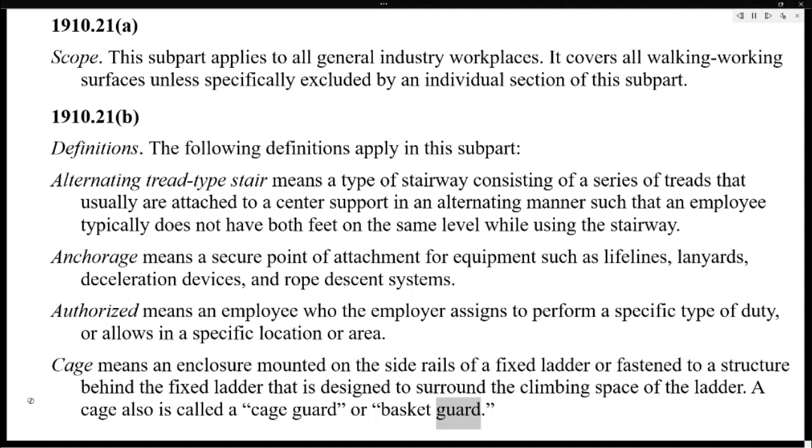Carrier means the track of a ladder safety system that consists of a flexible cable or rigid rail attached to the fixed ladder or immediately adjacent to it. Combination ladder means a portable ladder that can be used as a step ladder, extension ladder, trestle ladder, or stairway ladder. The components of a combination ladder also may be used separately as a single ladder.

Dangerous equipment means equipment, such as vats, tanks, electrical equipment, machinery, equipment or machinery with protruding parts, or other similar units that, because of their function or form, may harm an employee who falls into or onto the equipment. Designated area means a distinct portion of a walking-working surface delineated by a warning line in which employees may perform work without additional fall protection.

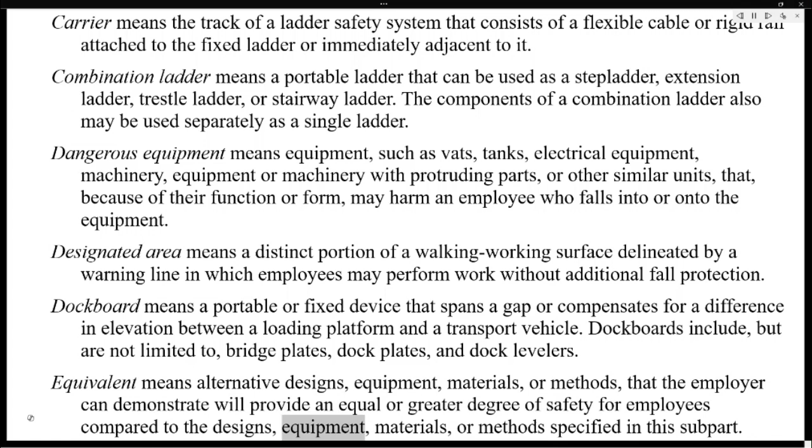Dockboard means a portable or fixed device that spans a gap or compensates for a difference in elevation between a loading platform and a transport vehicle. Dockboards include, but are not limited to, bridge plates, dock plates, and dock levelers. Equivalent means alternative designs, equipment, materials, or methods that the employer can demonstrate will provide an equal or greater degree of safety for employees compared to the designs, equipment, materials, or methods specified in this subpart.

Extension ladder means a non-self-supporting portable ladder that is adjustable in length. Failure means a load refusal, breakage, or separation of component parts. A load refusal is the point at which the ultimate strength of a component or object is exceeded. Fall hazard means any condition on a walking-working surface that exposes an employee to a risk of harm from a fall on the same level or to a lower level. Fall protection means any equipment, device, or system that prevents an employee from falling from an elevation or mitigates the effect of such a fall.

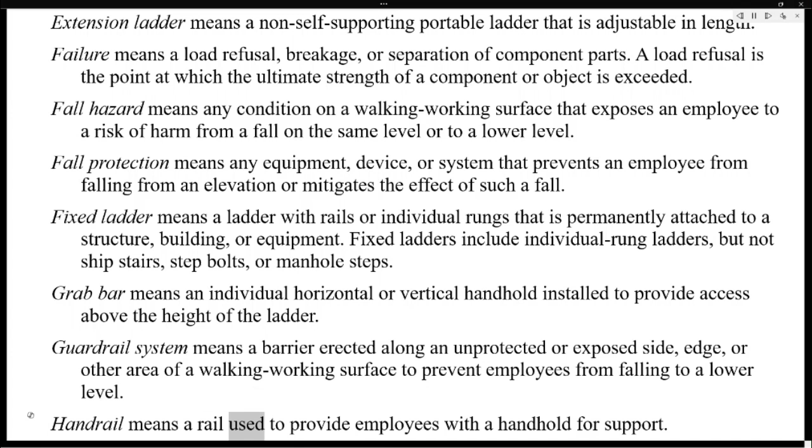Fixed ladder means a ladder with rails or individual rungs that is permanently attached to a structure, building, or equipment. Fixed ladders include individual rung ladders, but not ship stairs, step bolts, or manhole steps. Grab bar means an individual horizontal or vertical handhold installed to provide access above the height of the ladder. Guardrail system means a barrier erected along an unprotected or exposed side, edge, or other area of a walking-working surface to prevent employees from falling to a lower level. Handrail means a rail used to provide employees with a handhold for support.

Hoist area means any elevated access opening to a walking-working surface through which equipment or materials are loaded or received. Hole means a gap or open space in a floor, roof, horizontal walking-working surface, or similar surface that is at least 2 inches (5 centimeters) in its least dimension. Individual rung ladder means a ladder that has rungs individually attached to a building or structure. An individual rung ladder does not include manhole steps.

Ladder means a device with rungs, steps, or cleats used to gain access to a different elevation. Ladder safety system means a system designed to eliminate or reduce the possibility of falling from a ladder. A ladder safety system usually consists of a carrier, safety sleeve, lanyard, connectors, and body harness. Cages and wells are not ladder safety systems.

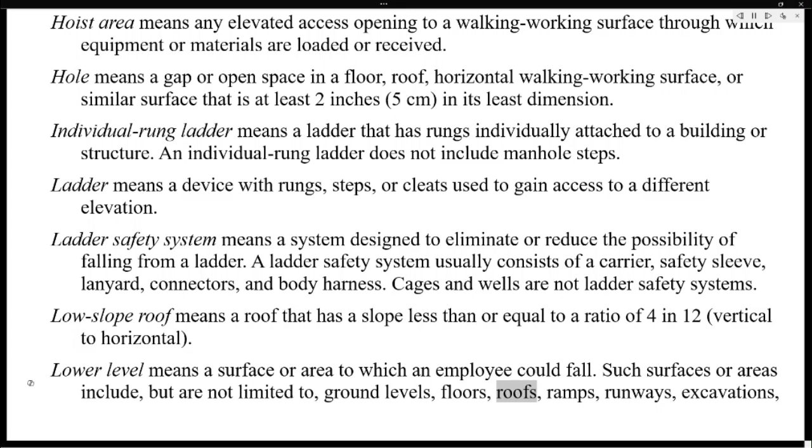Low-slope roof means a roof that has a slope less than or equal to a ratio of 4:12, vertical to horizontal. Lower level means a surface or area to which an employee could fall. Such surfaces or areas include, but are not limited to, ground levels, floors, roofs, ramps, runways, excavations, pits, tanks, materials, water, equipment, and similar surfaces and structures, or portions thereof. Manhole steps means steps that are individually attached to or set into the wall of a manhole structure.

Maximum intended load means the total load, weight, and force of all employees, equipment, vehicles, tools, materials, and other loads the employer reasonably anticipates to be applied to a walking-working surface at any one time. Mobile means manually propelled or movable. Mobile ladder stand means a mobile, fixed height, self-supporting ladder that usually consists of wheels or casters on a rigid base and steps leading to a top step. A mobile ladder stand also may have handrails and is designed for use by one employee at a time.

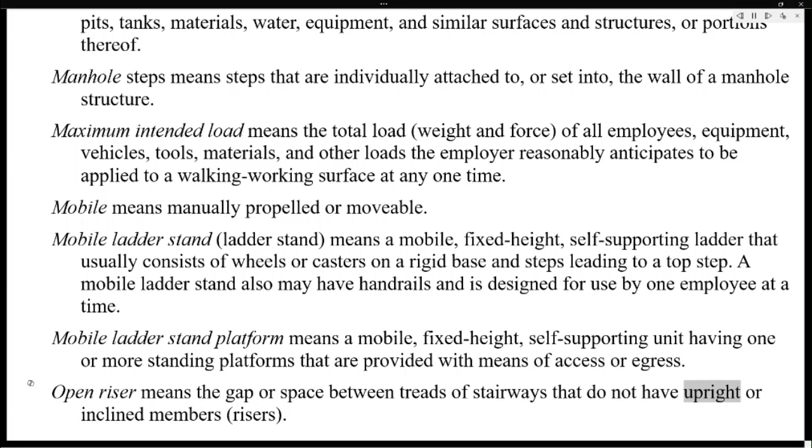Mobile ladder stand platform means a mobile, fixed height, self-supporting unit having one or more standing platforms that are provided with means of access or egress. Open riser means the gap or space between treads of stairways that do not have upright or inclined members (risers). Opening means a gap or open space in a wall, partition, vertical walking-working surface, or similar surface that is at least 30 inches (76 centimeters) high and at least 18 inches (46 centimeters) wide, through which an employee can fall to a lower level.

Personal fall arrest system means a system used to arrest an employee in a fall from a walking working surface. It consists of a body harness, anchorage, and connector. The means of connection may include a lanyard, deceleration device, lifeline, or a suitable combination of these.

Personal fall protection system means a system, including all components, an employer uses to provide protection from falling or to safely arrest an employee's fall if one occurs. Examples of personal fall protection systems include personal fall arrest systems, positioning systems, and travel restraint systems. Platform means a walking working surface that is elevated above the surrounding area.

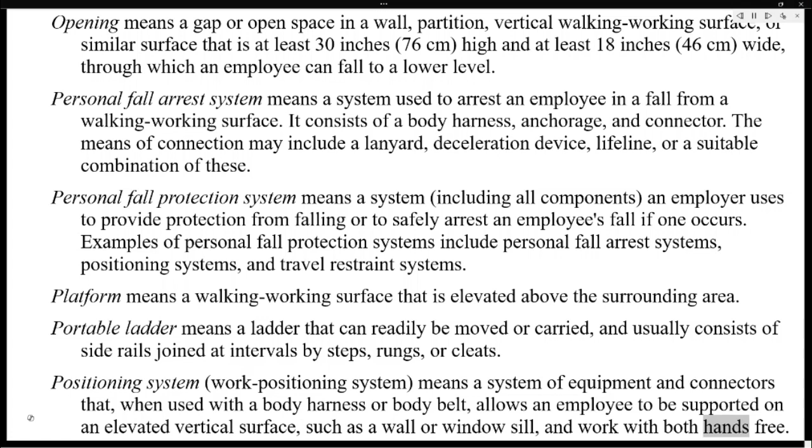Portable ladder means a ladder that can readily be moved or carried, and usually consists of side rails joined at intervals by steps, rungs, or cleats. Positioning system (work positioning system) means a system of equipment and connectors that, when used with a body harness or body belt, allows an employee to be supported on an elevated vertical surface, such as a wall or windowsill, and work with both hands free. Positioning systems also are called positioning system devices and work positioning equipment.

Qualified describes a person who, by possession of a recognized degree, certificate, or professional standing, or who by extensive knowledge, training, and experience has successfully demonstrated the ability to solve or resolve problems relating to the subject matter, the work, or the project. Ramp means an inclined walking working surface used to access another level. Riser means the upright, vertical, or inclined member of a stair that is located at the back of a stair tread or platform and connects close to the front edge of the next higher tread, platform, or landing.

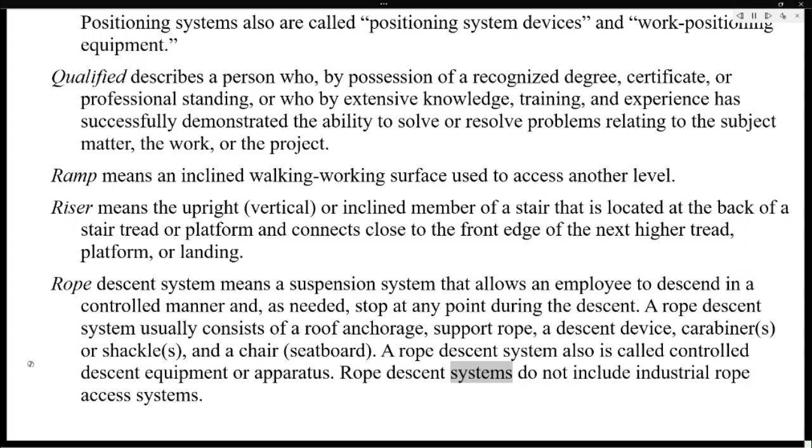Rope descent system means a suspension system that allows an employee to descend in a controlled manner and, as needed, stop at any point during the descent. A rope descent system usually consists of a roof anchorage, support rope, a descent device, carabiners or shackles, and a chair (seatboard). A rope descent system also is called controlled descent equipment or apparatus. Rope descent systems do not include industrial rope access systems.

Rung, step, or cleat means the crosspiece of a ladder on which an employee steps to climb up and down. Runway means an elevated walking working surface, such as a catwalk, a footwalk along shafting, or an elevated walkway between buildings. Scaffold means any temporary elevated or suspended platform and its supporting structure, including anchorage points, used to support employees, equipment, materials, and other items. For purposes of this subpart, a scaffold does not include a crane-suspended or derrick-suspended personnel platform or a rope descent system.

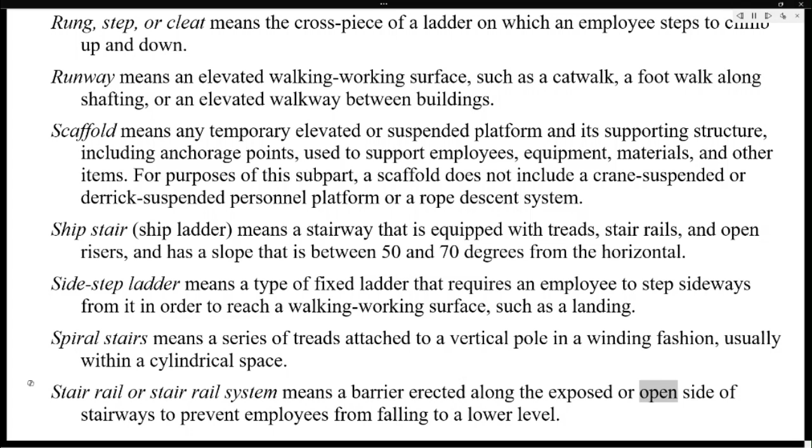Ship stair (ship ladder) means a stairway that is equipped with treads, stair rails, and open risers, and has a slope that is between 50 and 70 degrees from the horizontal. Sidestep ladder means a type of fixed ladder that requires an employee to step sideways from it in order to reach a walking working surface, such as a landing. Spiral stairs means a series of treads attached to a vertical pole in a winding fashion, usually within a cylindrical space. Stair rail or stair rail system means a barrier erected along the exposed or open side of stairways to prevent employees from falling to a lower level.

Stairway (stairs) means risers and treads that connect one level with another and includes any landings and platforms in between those levels. Stairways include standard, spiral, alternating tread type, and ship stairs. Standard stairs means a fixed or permanently installed stairway. Ship, spiral, and alternating tread type stairs are not considered standard stairs. Step bolt (pole step) means a bolt or rung attached at intervals along a structural member used for foot placement and as a handhold when climbing or standing.

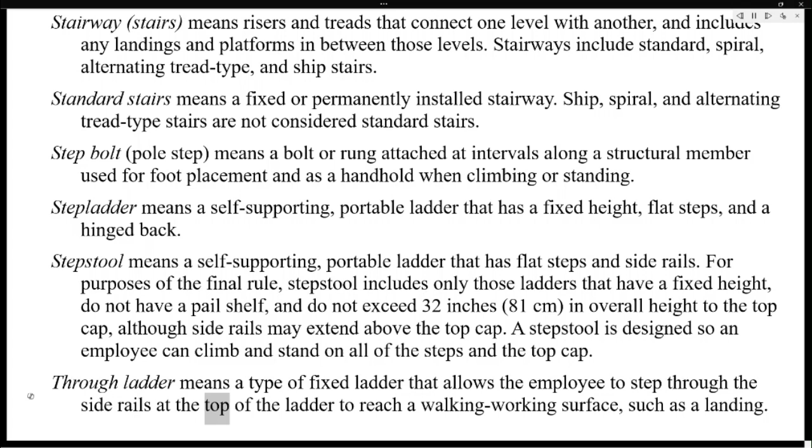Stepladder means a self-supporting, portable ladder that has a fixed height, flat steps, and a hinged back. Step stool means a self-supporting, portable ladder that has flat steps and side rails. For purposes of the final rule, step stool includes only those ladders that have a fixed height, do not have a pail shelf, and do not exceed 32 inches (81 centimeters) in overall height to the top cap, although side rails may extend above the top cap. A step stool is designed so an employee can climb and stand on all of the steps and the top cap. Through ladder means a type of fixed ladder that allows the employee to step through the side rails at the top of the ladder to reach a walking working surface, such as a landing.

Tieback means an attachment between an anchorage (e.g., structural member) and a supporting device (e.g., parapet clamp or cornice hook). Toeboard means a low protective barrier that is designed to prevent materials, tools, and equipment from falling to a lower level and protect employees from falling. Travel restraint system means a combination of an anchorage, anchorage connector, lanyard or other means of connection, and body support that an employer uses to eliminate the possibility of an employee going over the edge of a walking working surface. Tread means a horizontal member of a stair or stairway, but does not include landings or platforms.

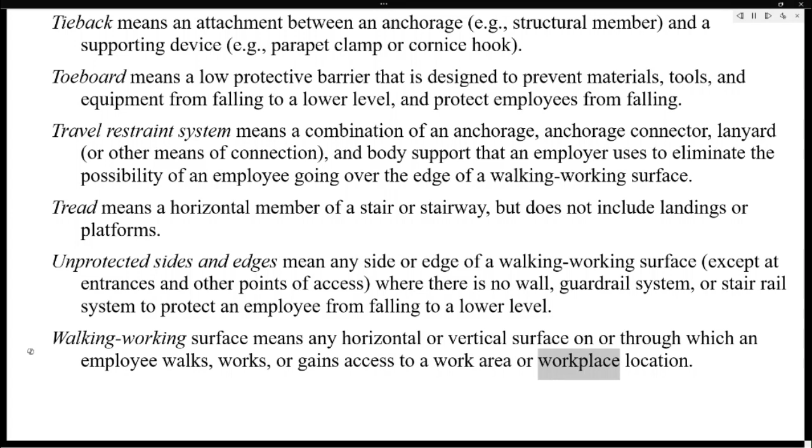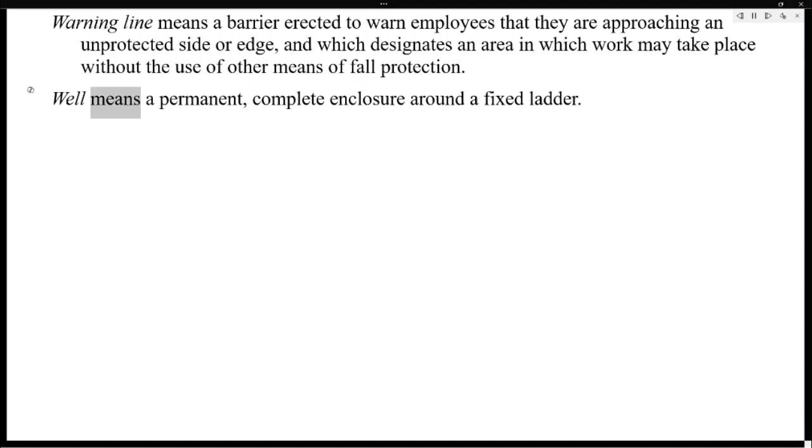Unprotected sides and edges mean any side or edge of a walking working surface, except at entrances and other points of access, where there is no wall, guardrail system, or stair rail system to protect an employee from falling to a lower level. Walking working surface means any horizontal or vertical surface on or through which an employee walks, works, or gains access to a work area or workplace location. Warning line means a barrier erected to warn employees that they are approaching an unprotected side or edge, and which designates an area in which work may take place without the use of other means of fall protection. Well means a permanent, complete enclosure around a fixed ladder.